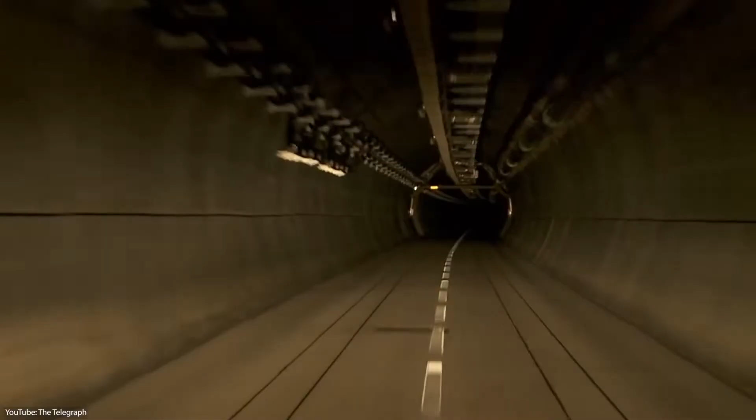The age of the machines is definitely upon us, but do not fear. These machines aren't coming to destroy us like the Terminator. No, but they are here to help make our lives better, and now artificial intelligence is being integrated into mega construction projects.

In today's video, we're going to be taking a look at how AI is transforming the construction industry in the world right now.

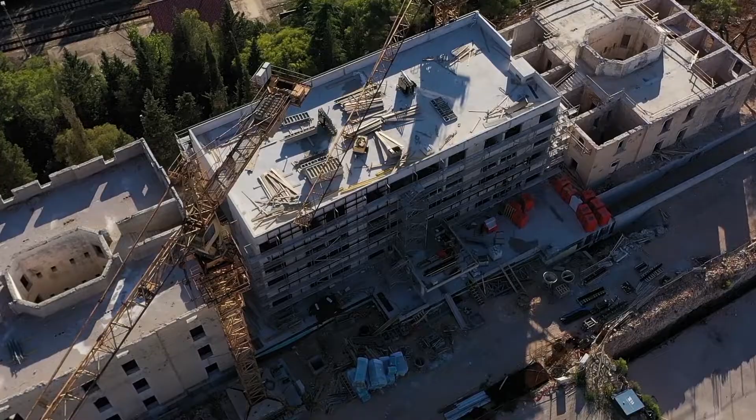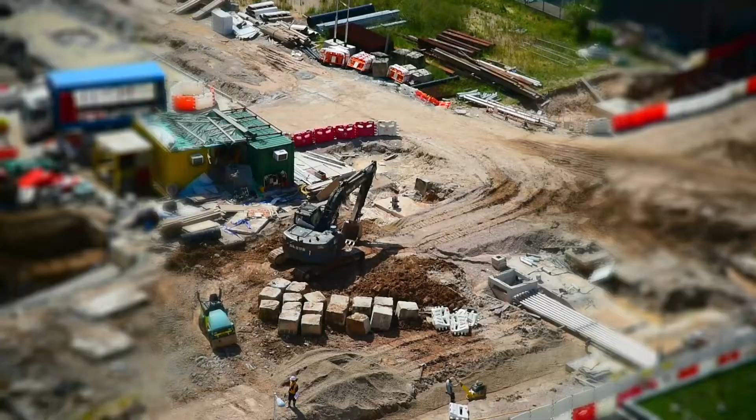Let's get into it. One of the biggest industries in the world is construction. Around 7% of the global labor force is employed in this important area of the global economy. Construction corporations spend close to $10 trillion annually, according to research from the McKinsey Global Institute. This gives one an idea of the size of the industry.

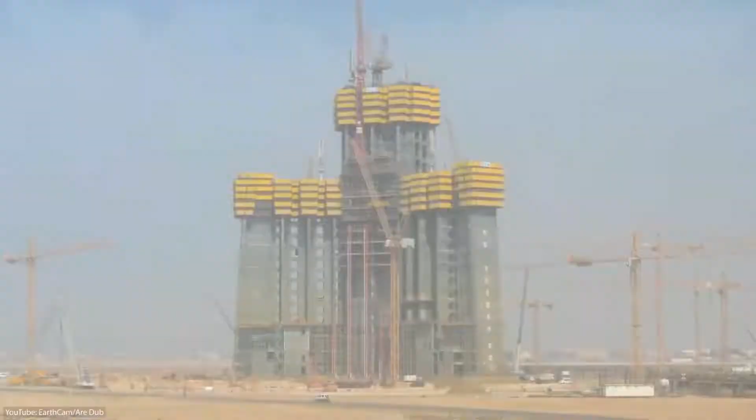Artificial intelligence can be and is now being used in construction management to address the labor shortage that exists in this sector. Humans have been building shelters and homes for millennia.

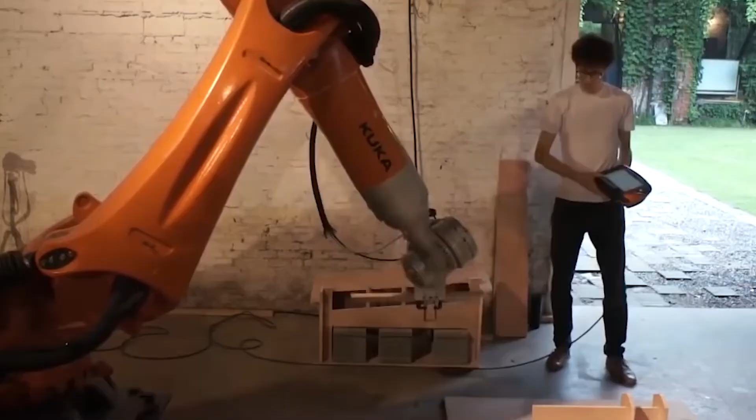The construction industry has evolved from building simple houses out of mud to skyscrapers. This apparent structural change is due to improved planning and design methods.

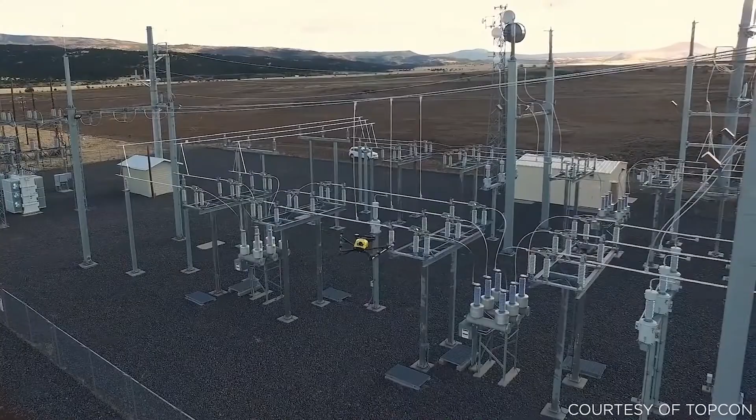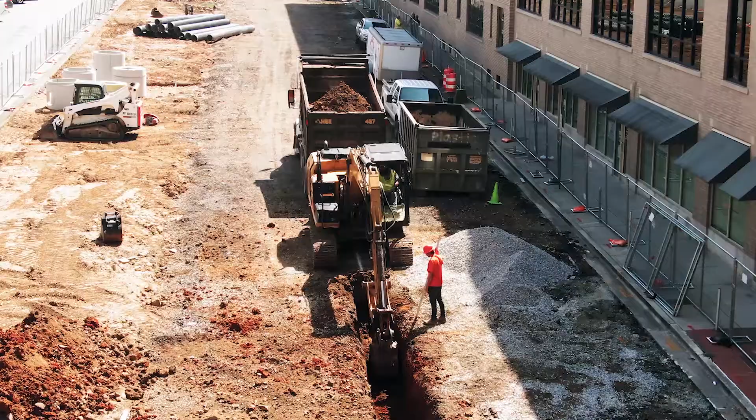The AI-based Building Information Modeling, or BIM, process has helped architects, engineers, and construction professionals make 3D model designs to plan efficiently, design, build, and repair buildings and infrastructure more effectively.

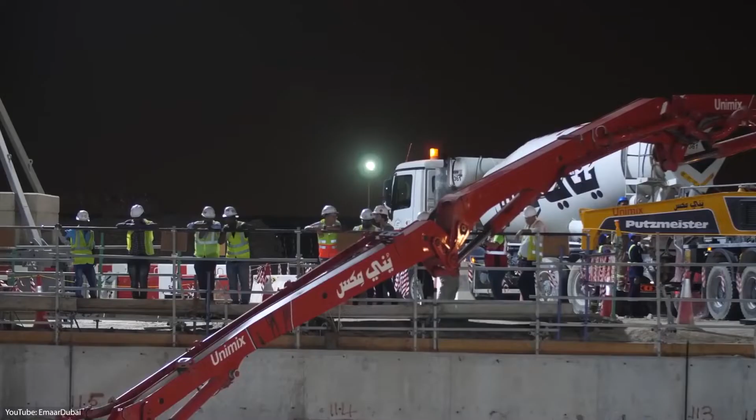When it comes to the potential application of AI in construction, the possibilities are endless. It can act as an intelligent assistant that never gets tired and rarely makes mistakes. There are some applications of artificial intelligence that play an important role in the construction industry.

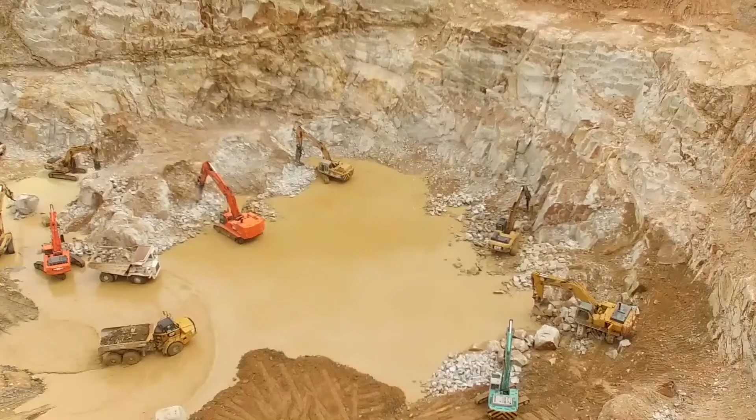Use of virtual reality in construction. One of the best applications of cutting-edge technology in the construction industry is virtual reality, or VR. Builders are able to provide a thorough virtual tour of their new house even before work has started, thanks to virtual reality.

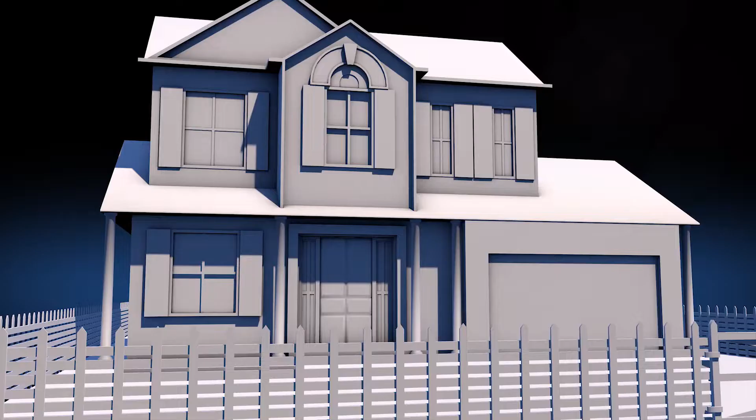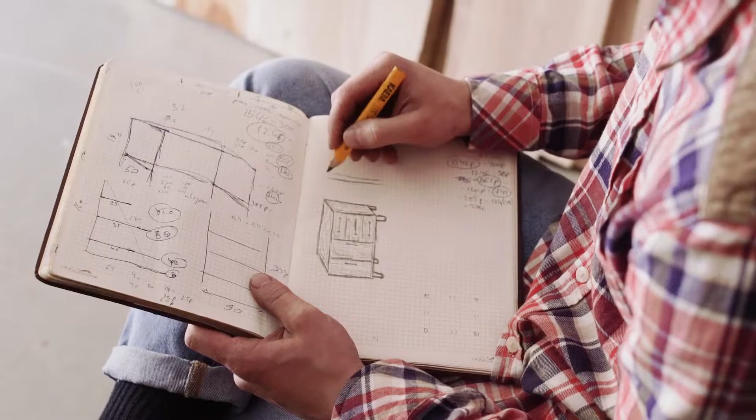Even before it is built, every member of the family can virtually tour their future house. Clients will benefit from having a clear vision for their home, and engineers will be helped to design the building and make the required adjustments to suit the client's wants. Overall, consumer happiness and experience will benefit from it.

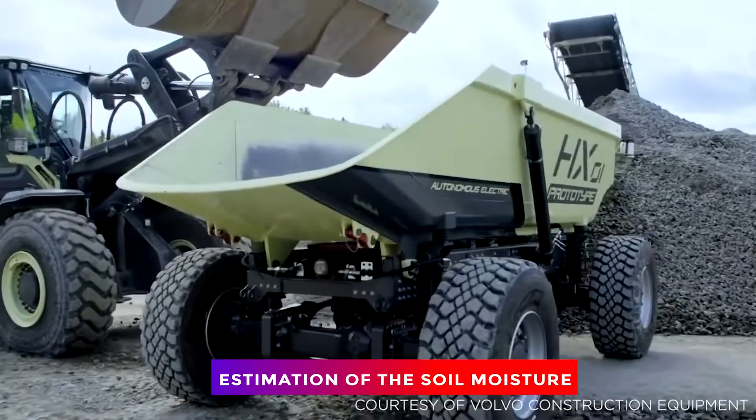Estimation of soil moisture. You are aware that by doing several tests in the lab, we can determine the amount of moisture present in a certain soil sample. What happens though when we need to measure or monitor the soil's moisture content across a wider area?

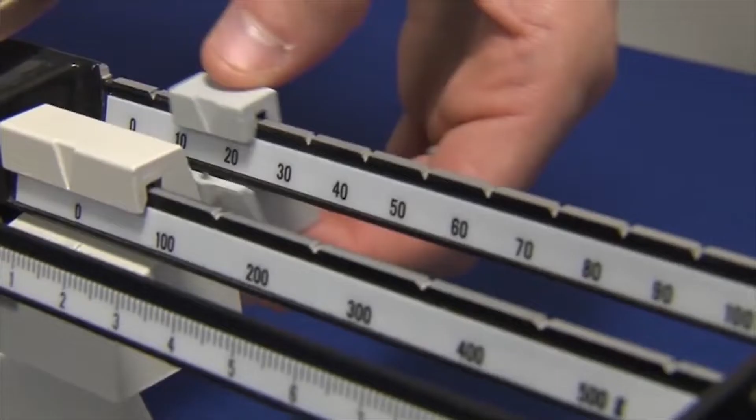With the use of artificial intelligence and machine learning, the moisture content of the soil can be assessed with the help of remotely accessible sensor data or even satellite image data with greater accuracy.

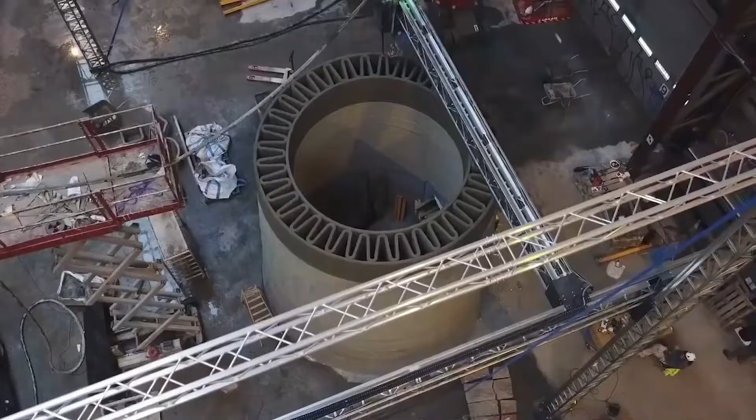3D printing. Technological advancements are making every task easier and better. One of the advanced technologies, 3D printing, helps us build structures precisely in less time, with less labor, expense, and with less waste.

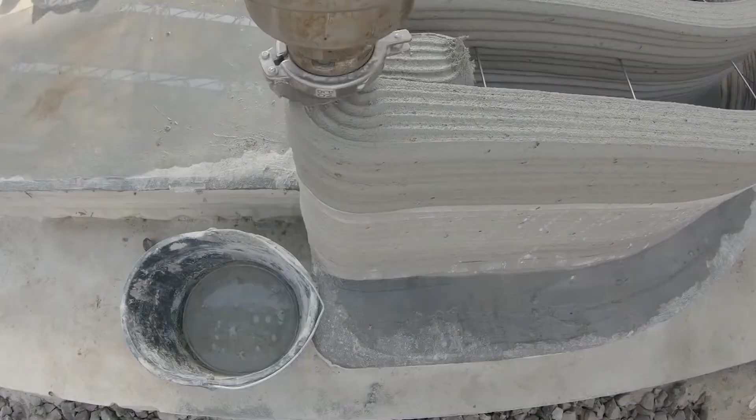The way architectural plans are presented is evolving due to 3D modeling. Architects and designers can now be more creative and experimental because of 3D modeling. Construction companies are also becoming aware of the possibilities of AI and 3D printing, as well as how they will affect the future of the sector.

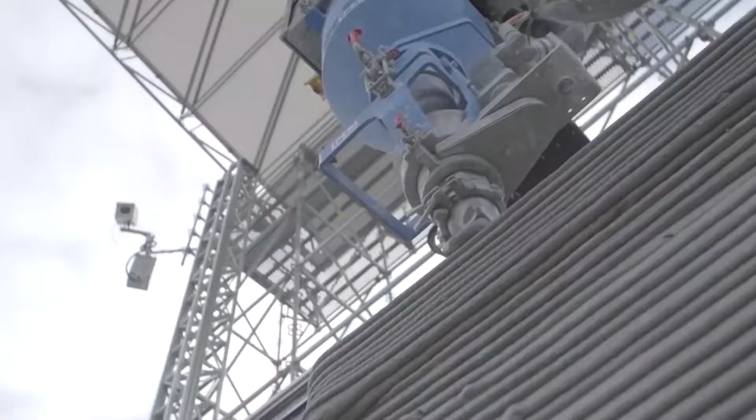Scheduling. In projects, artificial neural networks and AI can be used to forecast cost overruns depending on variables including project size, contract type, and project manager skill level.

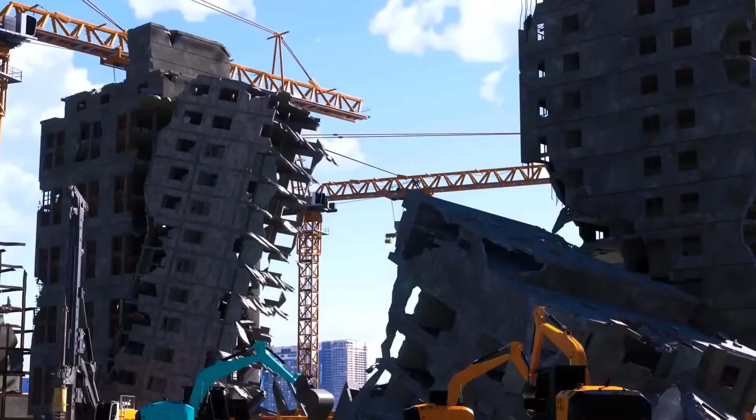Artificial intelligence can assist in developing realistic project timetables for the future and avoid construction delays by being used in scheduling construction projects. Better building design.

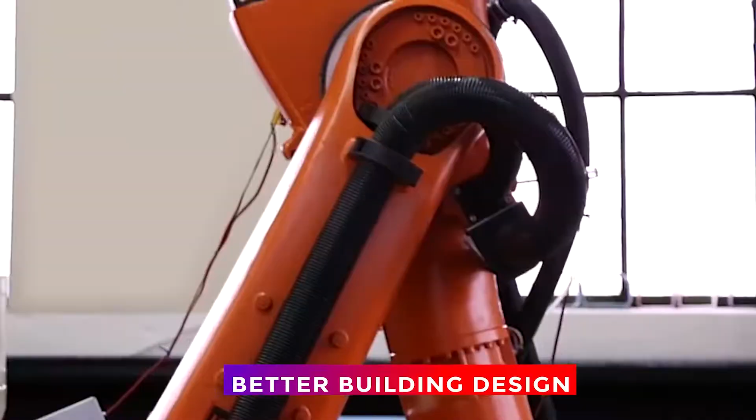Over the last 10 to 15 years, the construction industry's job sites have undergone a massive transformation, shifting from a paper-based workflow to a fully digital workflow. The drawings, which were previously drawn manually on sheets in 2D, are now drawn digitally in 3D using software.

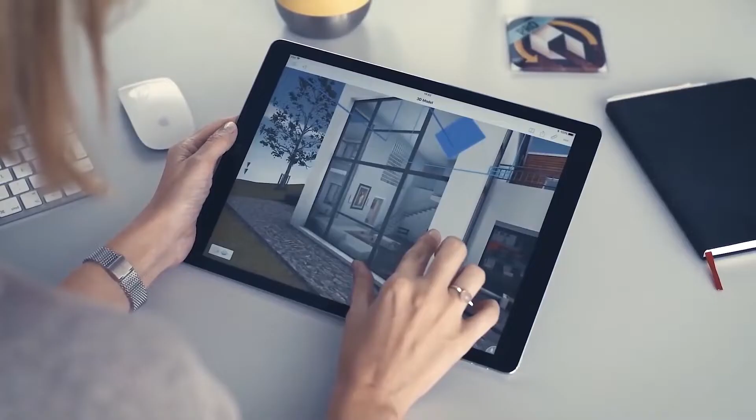Building Information Modeling, that's BIM, a 3D modeling-based method, gives construction engineering and architectural professionals the knowledge they need to efficiently plan, design, build, and maintain infrastructure.

There is currently software available that employs various machine learning algorithms to provide variations of solutions and offer other designs.

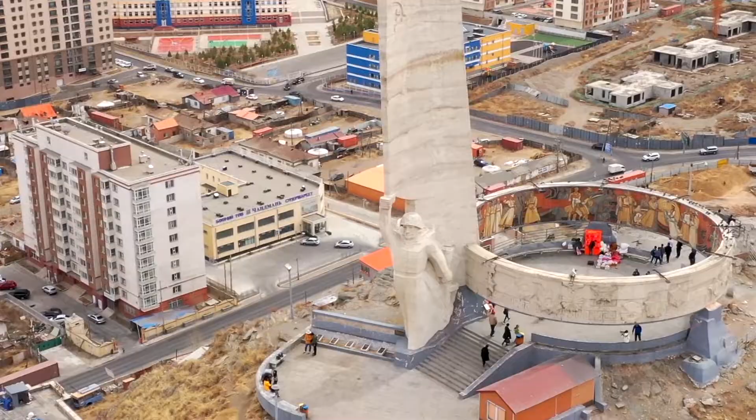Risk mitigation. Construction projects have an increased level of risk as they grow in scale. The project team may concentrate their resources on the main risk issues thanks to the usage of AI-powered monitors by certain general contractors today to prioritize risk on the job site.

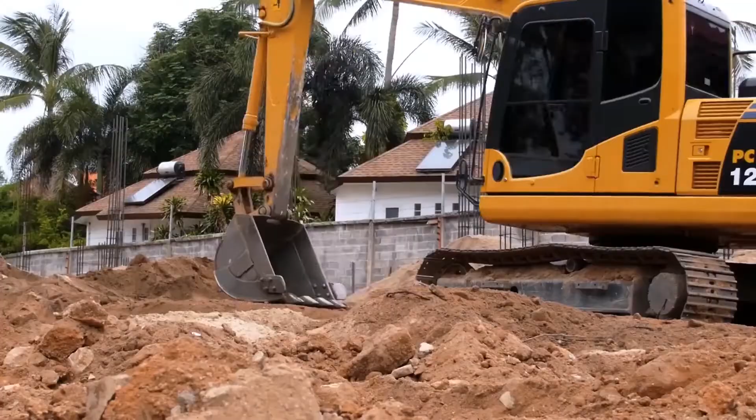Automatic issue prioritization is done with AI. By assigning subcontractors a risk score, construction managers can collaborate closely with high-risk teams to reduce risk.

Big data. AI systems are exposed to a limitless stream of data at a time when enormous volumes are being created daily, allowing them to continuously learn from it and get better.

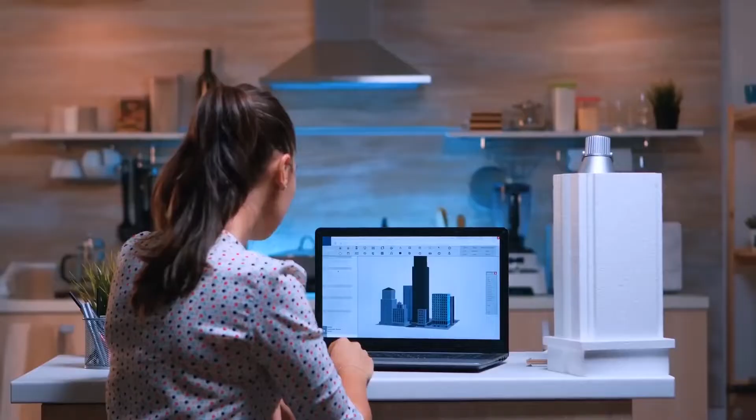A body of knowledge has developed from data gathered from mobile device photos, drone recordings, security sensors, building information modeling, and other sources. Big data analysis in construction is aided by AI.

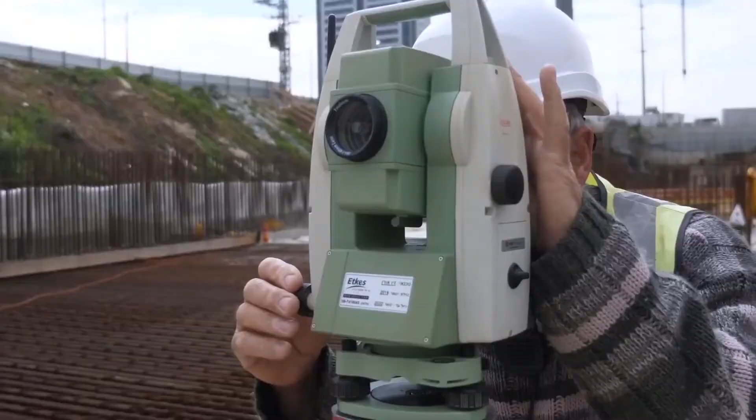Now, what would be the future of AI in the construction industry? Due to its possibilities, AI in construction has a bright future. Around the world, several industries are implementing artificial intelligence. AI has a significant impact on building planning as well. Construction sites will change as a result of artificial intelligence and machine learning.

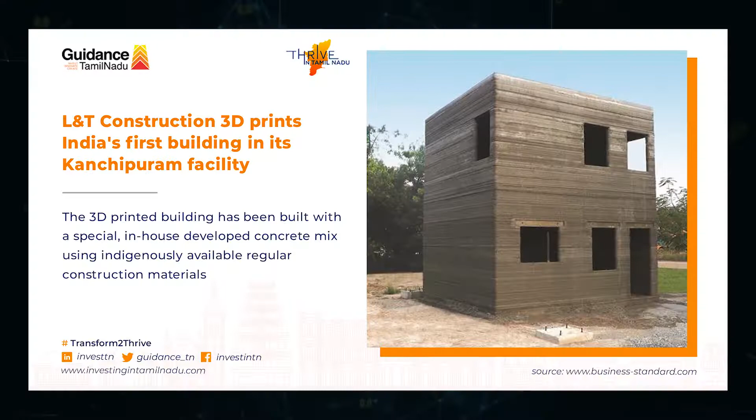The largest building contractor in India, Larsen & Toubro, recently built the nation's first two-story 3D printed structure. In order to fulfill industry demand, the construction business has to hire more than 4 lakh workers annually, according to a survey by Arcadis, a renowned design and consultancy organization.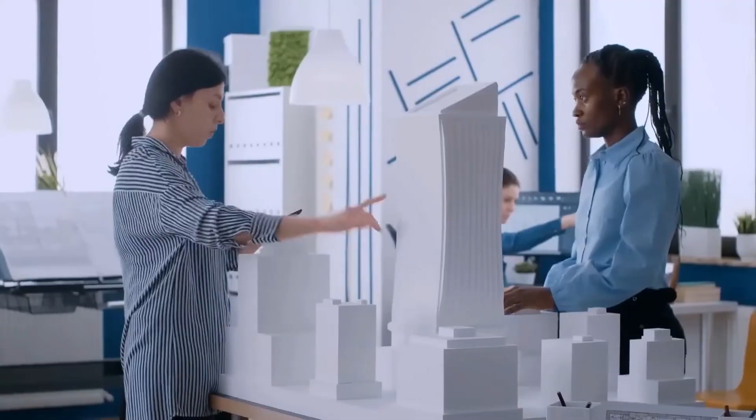The building industry will become more dependent on AI and machine learning if demand is not met. This will soon be able to take the place of people not only in office and design work, but also in building sites. Many industry professionals in the construction business believe that AI and machine learning will render the industry human-free by displacing employees with cutting-edge machinery.

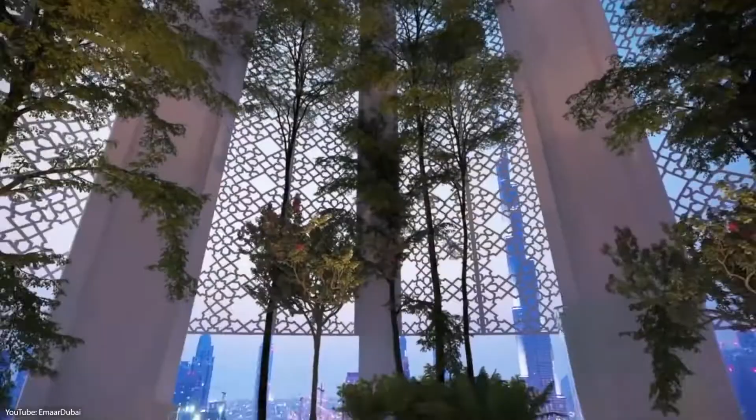I hope this video has increased your understanding of AI technology in the building industry. Now, what do you expect from AI in the construction industry?